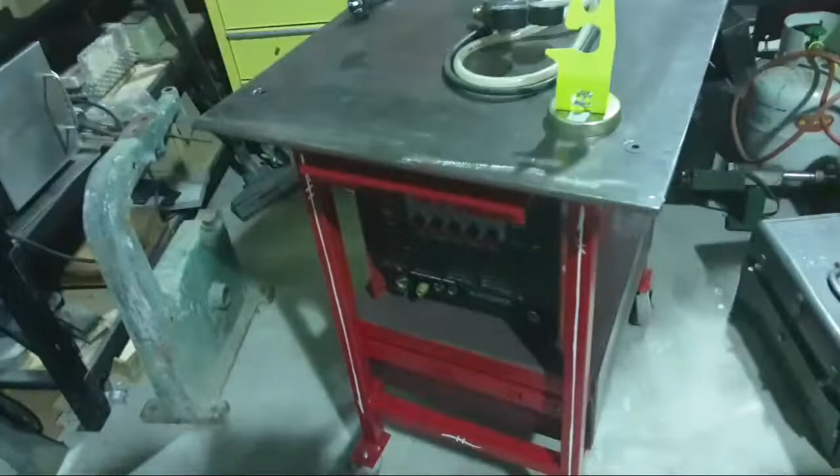So have a look - these are just like countersink M12 screws and some coupling nuts and some bolts. That was the top there that had a machine bolted on it before.

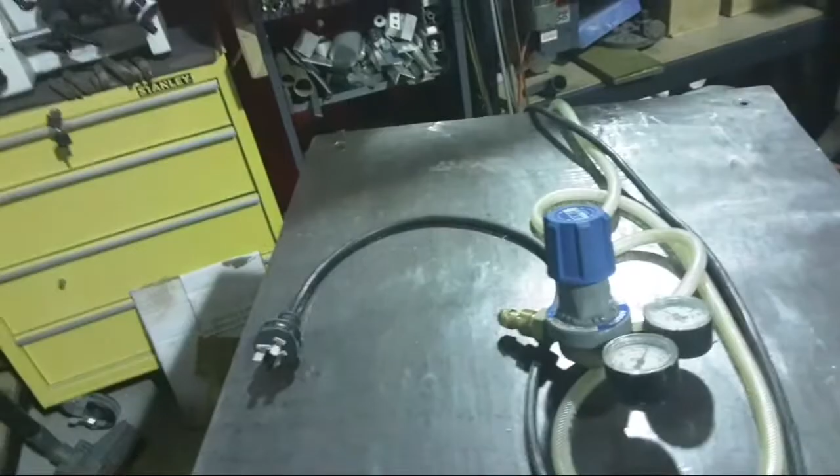Don't know about this whole clamp on this bench thing. Someone had this really great idea - hold the phones. Hasn't actually been put into practice yet, but we'll live with it.

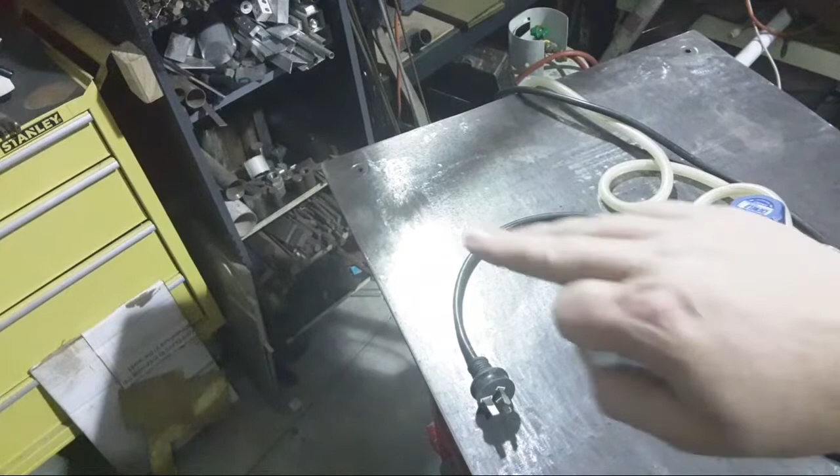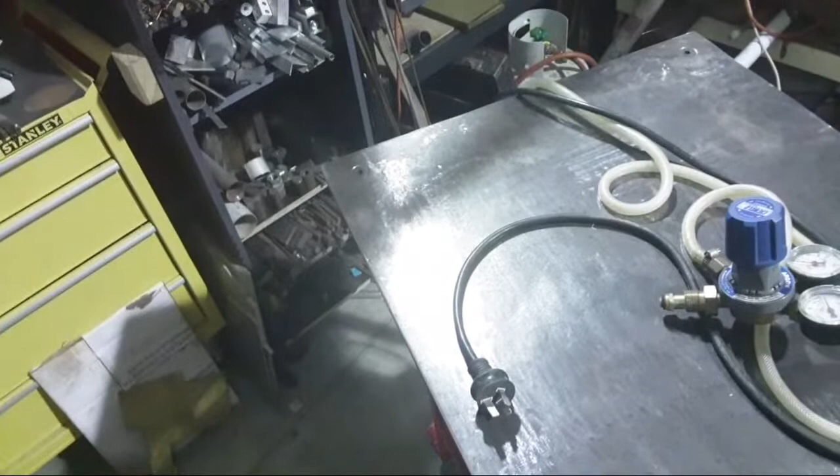Anyway, that's me just talking. So, got a decent lump of plate on it - it's really good. No bottle yet. Still got to find some transport for a gas bottle to get here, and then I'll mess around with this and probably learn to weld again all over again, because I'm kind of a bit scratchy. Done a bit of stick welding since I've had this here, but that's about it.

Yeah, Adam says I put the old man's name on the side of that, which is a nice little bit of lettering. This drawer here is just kick open - look at that - and kick shut.

Electric plugs - talk electric plugs. That's just a 3-pin. No, we probably shouldn't talk about that plug - we won't. That's the welder plug, and that used to be 10 amp, but maybe it's not anymore, if you get my meaning.

So there's another prototype job, just because I can, not because I might actually make something, over there on the lathe, if you have a look at that. Something I'm messing about with too.

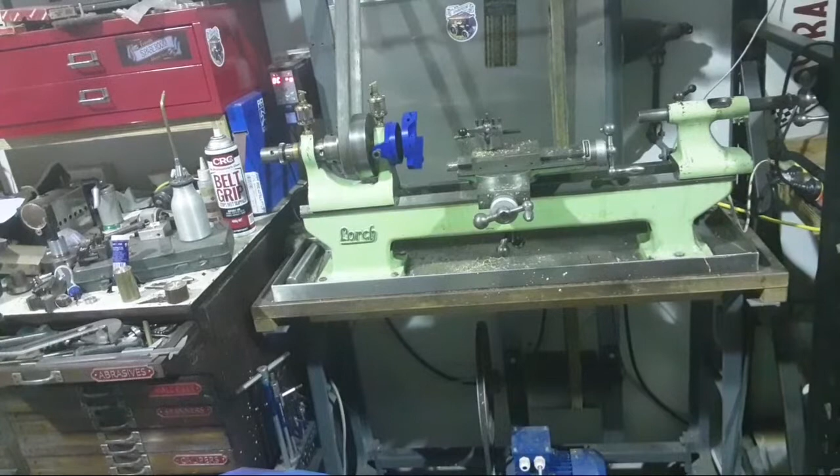Messing with that - I don't know what I'm going to do with that, but it all looks like it's probably actually going to work now. I've 3D printed, I've got a set of castings made for that device, and maybe one day I might make them, but it'd be fun just to see if it works. So, been messing with that and printing a few things up, see how it goes - that's a fun little project.

So watch that space for this one. Might happen at some point, but it might not too. Don't hold your breath, it may not even work, it's just proof of concept. I made patterns out of wood before I had a 3D printer, so I really don't know whether it's going to work without machining the pattern, machining the castings, or making a 3D printed one and seeing if that works. So I'll print up some bits over the next couple of days and bolt it up and see what happens. Probably won't run it at full speed with 3D printed parts, but it'd be interesting to see the actual functions, which it might or might not.

So, yeah. You can draw your own conclusions about what that is and what it might do, or what it might not do. Anyway.

Bought some dowels for legs for the harmonograph. There you go, so they just need a bit of a finish up. Not a big job to finish them from there, I think, and do that probably without too much major sawdust or turning or anything. Also got some 8mm hydraulic tube, steel hydraulic tube pendulums for the harmonograph. Now we all know what it is.

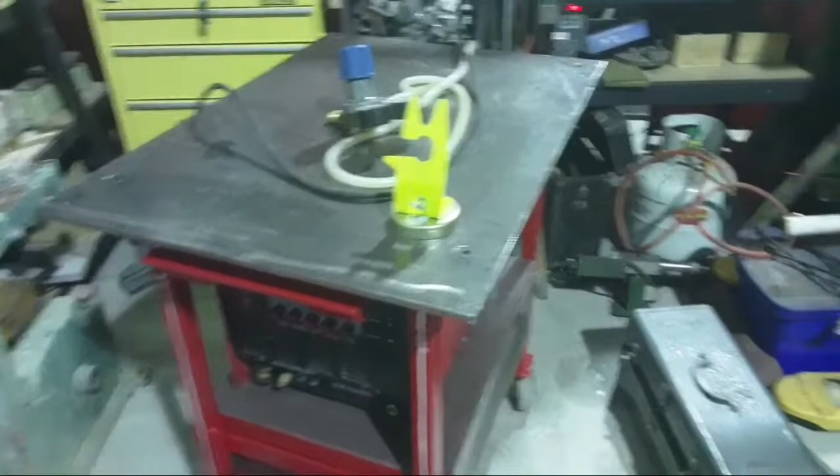That's just sort of a project that's waiting for me to clear this out. Because, hey Dan, because this lump of plate that was quite a bit bigger than that arrived in the workshop and I had to do something with it this weekend. So I've cleaned that up and screwed it on, and that's done. So I can forget about that. And I can get back onto this, probably the harmonograph or whatever else. See how we go.

Did this quick bit of sign writing on the weekend too. This goes up in the library above the spark plug display, antique spark plug collection box. So it fits in there on the wall there nicely. Quick job, bit rough. That's variegated silver, that leaf.

If anyone's interested, that's kind of a bit of a cow thing, to be honest. And didn't get our size quite right in a couple of places. By the time I got down to this end, it was a bit tacked off. So we've got a couple of gaps, but you can't patch this leaf, so we've got to live with it. So anyway, if it'd been plain silver or plain gold, it wouldn't have had some issues. But if you look really carefully, there are issues with it. But apart from that, it's not bad. Fairly pleased with it. So it just jumps out a bit. I like that.

In other news, flatmate Dan, new bike, new ride, Honda PCX 160. Pretty nice little bike actually for the money, brand new. Seems to have plenty of get up and go, and it's nice and easily serviced, easy to get on and off. It's all like keyless start and all that sort of stuff, immobiliser. ABS on the front, I think drums on the back. What other questions? I think they're belt drive.

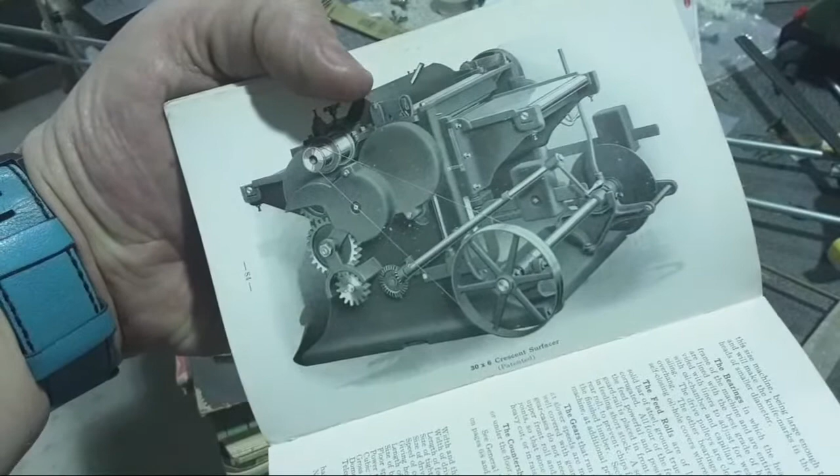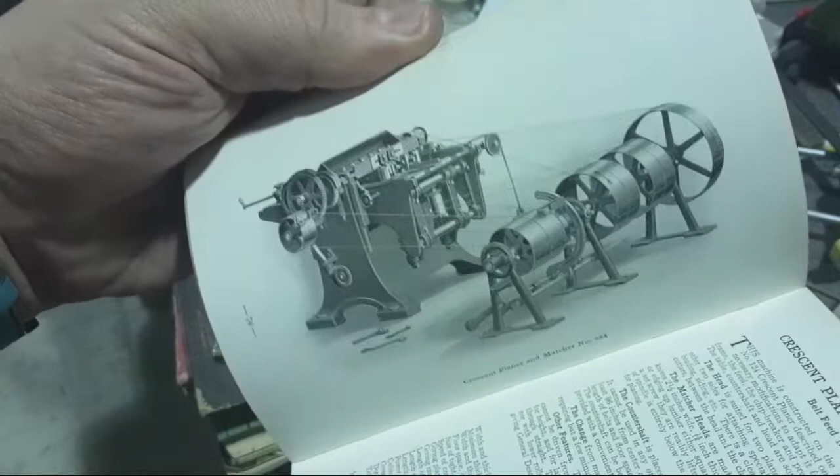Dropped off a huge box of books, and there's some cool stuff amongst them. I don't know if we're really very interested, but look at this. Crescent Woodworking Machinery catalogue. A lot of very cool things in there. Universal Borer. Surfacer. Planer and matcher. Look at the crazy line shaft gear on that to make everything work.

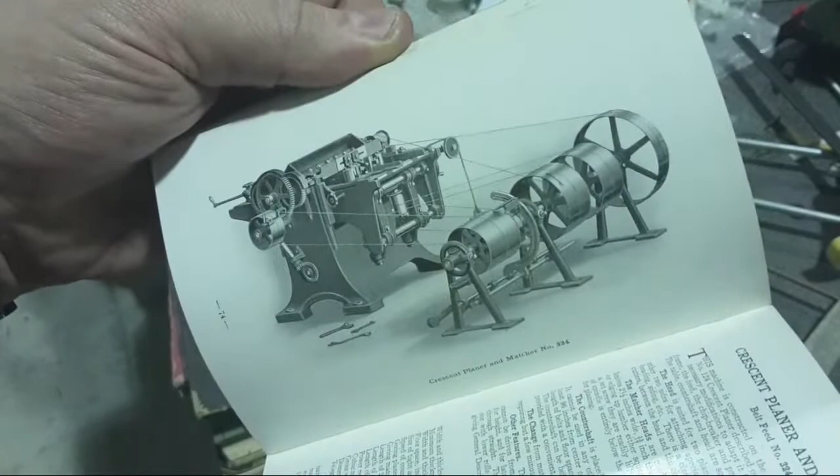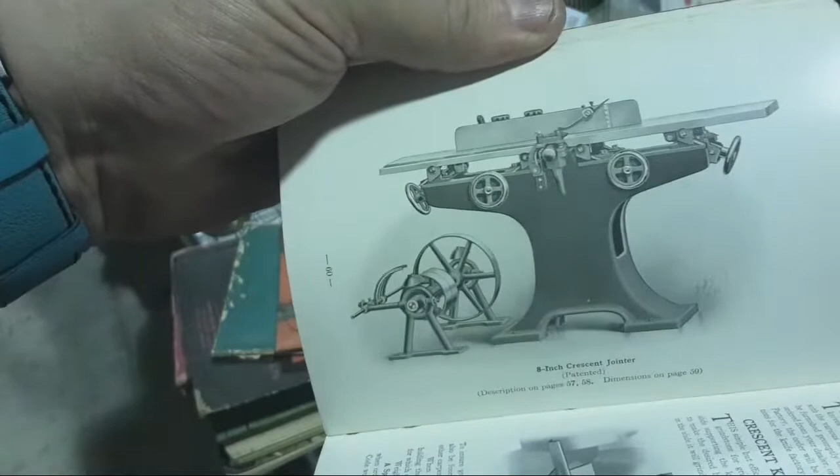Really nice technical illustrations. These are photographs that are actually airbrushed or retouched. Pretty nice, actually. 8-inch jointer. Don't know what year it is, but there's no square head on that machine, so that's pretty, if you look at that, it's a pretty modern machine, really.

1914. Pretty modern machine for 1914. Lots of cool stuff. So it's a fun book.

There's one called Taking Care of Your Battery, which is very important, I guess, if you're a motorist. There's an introductory instruction book on the Westinghouse automatic brake, which is an ex-railway book, I guess. Shows what the triple valve looks like, hoses, couplings, brake cylinders, things like that. Very cool.

Here's one called Why Don't the Railways? Don't know what this is about, I haven't really looked at it. The railways of Queensland belong to the people, apparently. We're trying to know something of the railway problems that directly or indirectly affect them. This is one of those old things where instead of fixing the problems, they just spend the money making a book of excuses, obviously. This is a book of excuses.

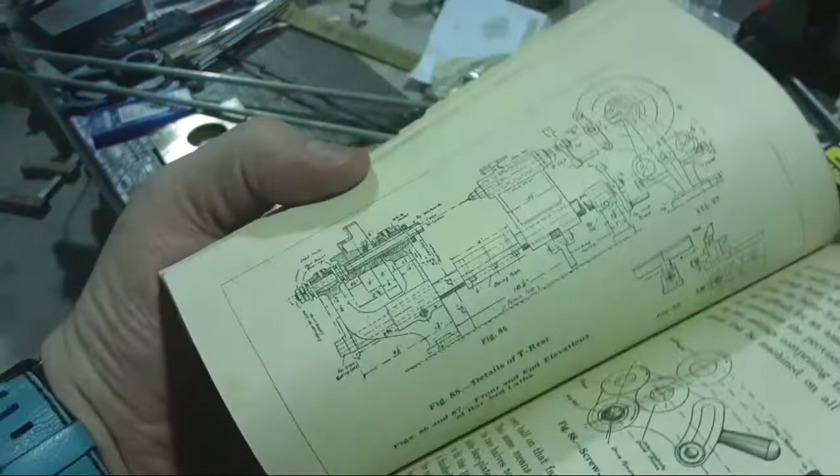Making and Using Small Lathes. This is a book and a half. Look at this, how cool is that? Lathe with round bar bed. Details of the T-rest, marking out the centre hole, aligning the bed shears.

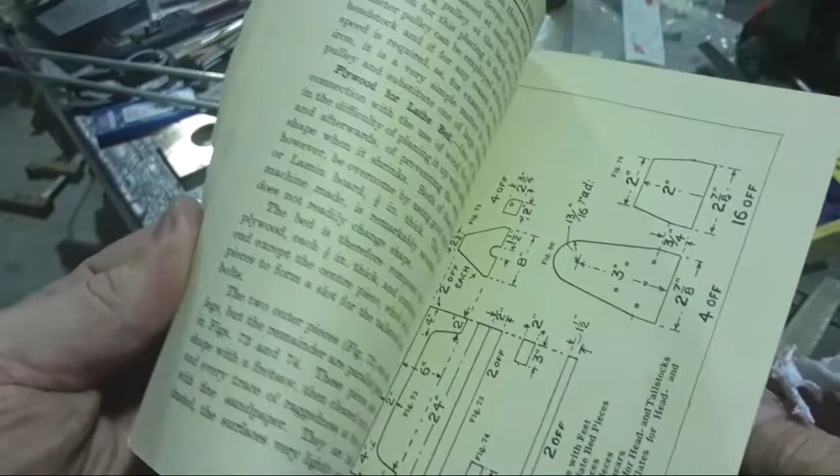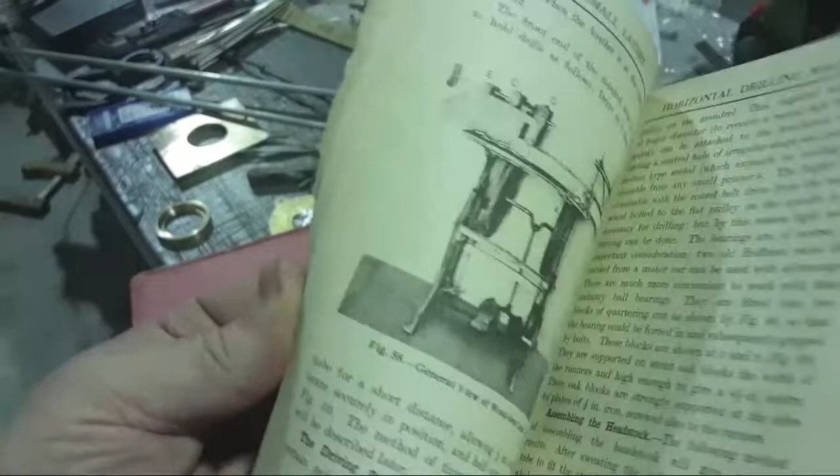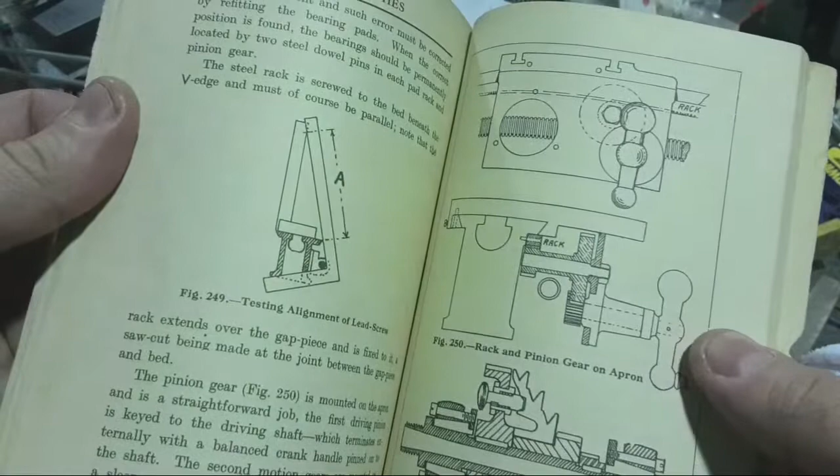There you go, Adam, it's a book on making your own lathe. How to set up a motor, how to set up a treadle. Details of a tailstock, look at that. The assembled driving wheel, pulleys, rack and pinion gears on aprons.

Screw cutting Yankee lathe made from castings and parts. How cool is that?

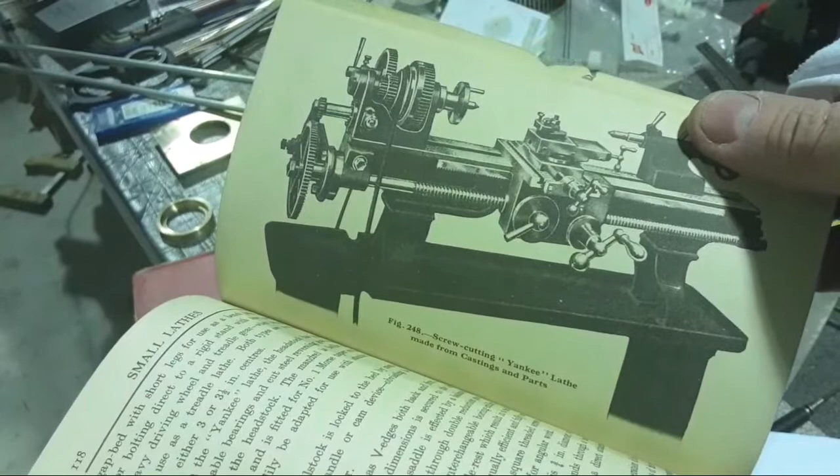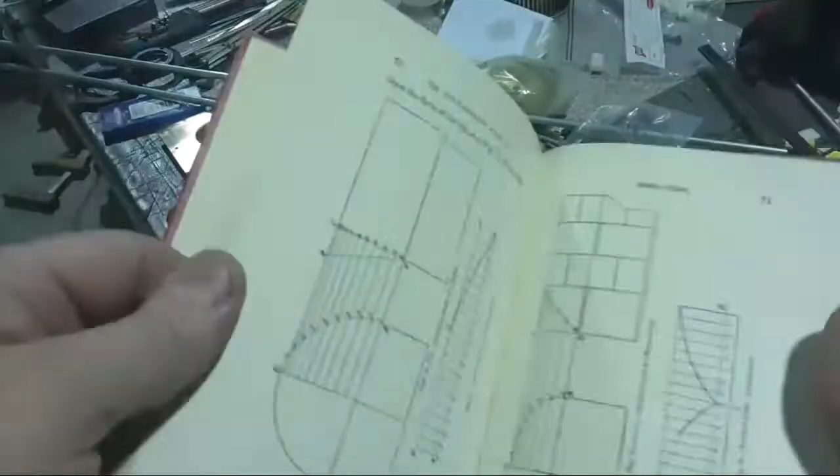There's one called The Boilermaker's Assistant by Courtney and Malden, from Technical Press. Cutting plates and pressures and templates, things like that, fit ups and joints.

Hey, John. So there we go.

Another one, I don't know if this is really boring anyone. How to Work Sheet Metal by Percival Marshall, which is a Model Engineer publication. Tin snips and stuff. Don't know if I'm that keen on sheet metal work, but anyway, fun book.

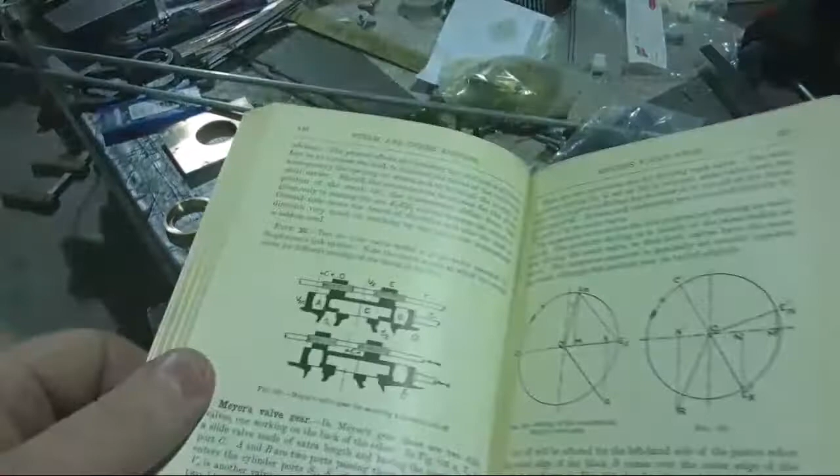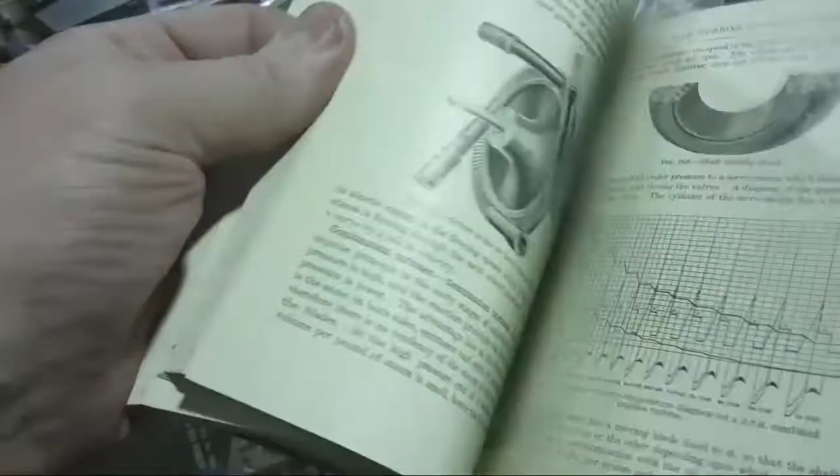Might be worth sitting down and reading. In turbines, some cool things in there.

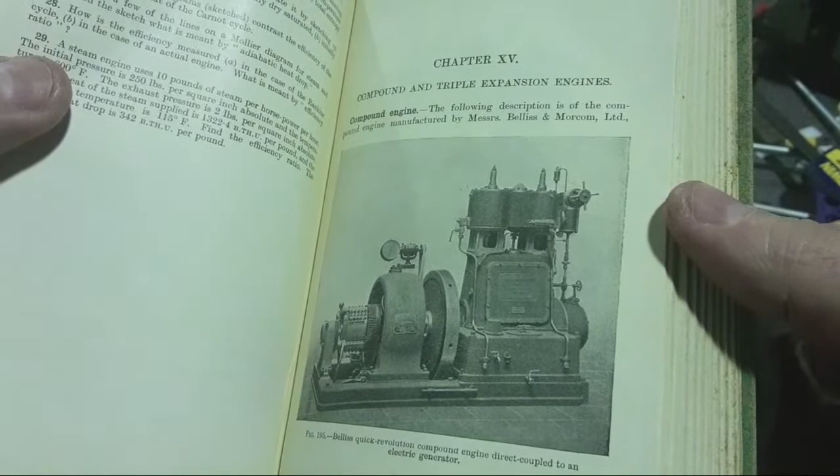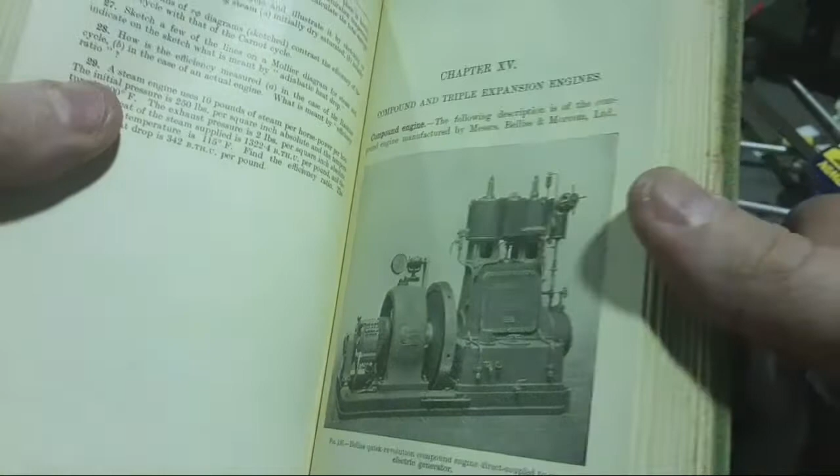Percival Marshall, he was earlier than World War II, I think. Well, by World War II, he must have been nearly dead. Percival Marshall founded Model Engineer in 1898. He was, I believe he was - oh gosh, no, I can't get my Percival Marshall history right, so I'm not going to say anything.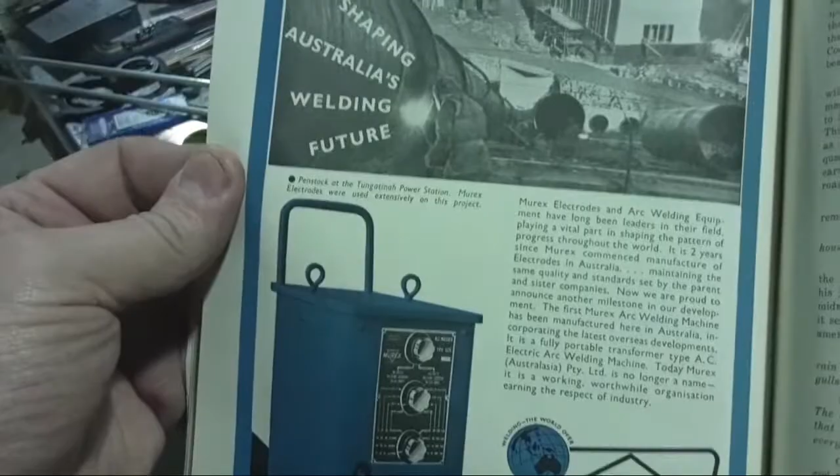Anywhere else in the world, you buy a Hobart Welder. In Hobart, you buy a Murex. There you go.

Derwent Park, Hobart, Tasmania. How cool is that? G'day. Dan's just come out to look at his bike again.

Charles Davis, Hardware Merchants, Connerville, Cressy. We built a trailer for the O'Connors at Connerville, Cressy. And the house looked just like that too in the 90s.

Where Tasmanian newsprint begins, there you go. There's a classy picture of two guys pulling a saw with this old wool flannel. That'd be itchy. They're both wearing flannel shirts, dungaree trousers, sawdust down the back there, and it'd be the most miserable thing. Sorry. If you've ever worn one of them shirts, the shearer's flannel's not much fun, sawdust.

So there you go. You go, Donald Gorridge.

Also owned the Yellow Express service, the West Coast Freighting service, and West Coast Motors at Queenstown. They sold Land Rovers, Rover cars. There's a Rover 90, 70 or 90. And the Javelin, Bradford commercial vehicles, Matchless and Triumph motorcycles, Simplex marine engines, and Landmaster rotary hoe. There you go.

Ross Garage is still there, still looks exactly the same, I think. Very Hobart oriented, Fuller's Bookshop's still there. And the Samoyed Kennels.

So there you go, some pretty cool stuff in this book, actually. I really enjoyed that. Sorry to... How about Daffa Crisps?

The Ship Hotel. Furners Hotel in Ulverstone. Customs House Hotel in Hobart. British Hotel Deloraine, which still looks something like that, I think. Cabaret Saturday nights at the Regent Hotel in Burnie.

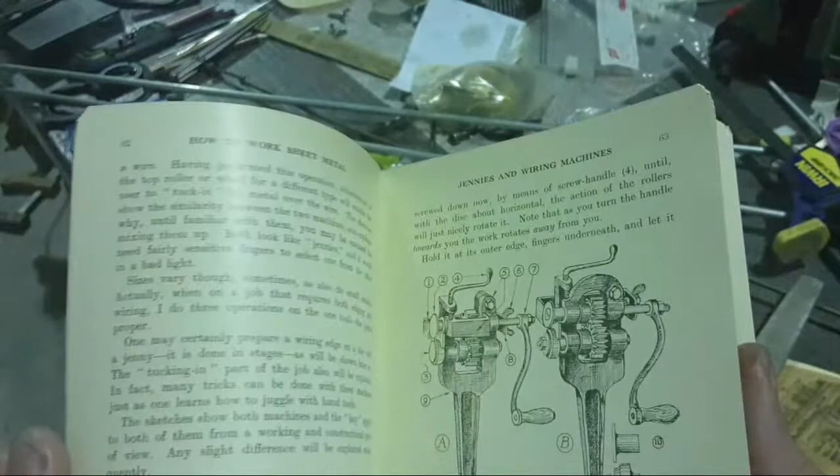Here's a book that's missing the cover. Or is that the cover? No, that's not the cover. How to work sheet metal. I'm going to sit down and read this - how cool is that? How to work sheet metal.

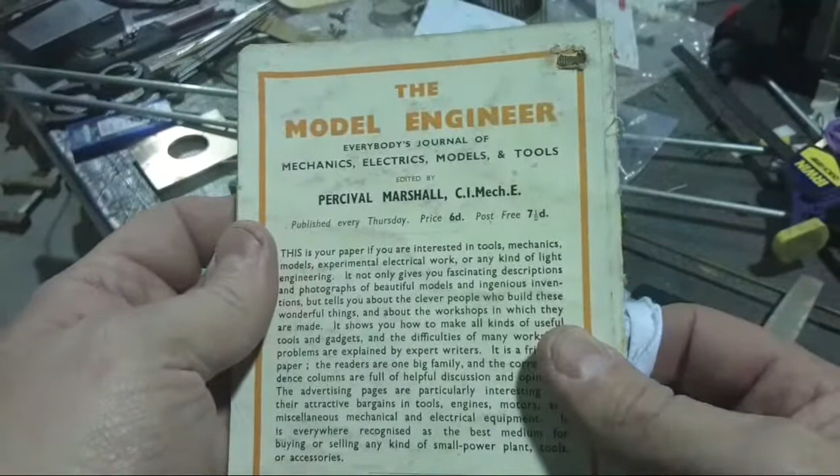Tank construction, brazing, soldering, riveting. And of course the Model Engineers Percival Marshall book - get this week's issue, it'll open the door to a new world of technical interest for you, obtainable through all newsagents, as above.

And the handbook on boiler making. Didn't we already say handbook on boiler making? There might be two of them. Yeah, I think we already looked at that. The other one never had covers - might be the same book, I don't know if it is or not. The other one was a bit more technical.

This one's got fold-out drawings. That's got a fold-out chart - bore 2-inch, curve 1. I don't know what the chart is, but anyway, it's there.

Some of these need some work. Anyway, books - love old books. Sorry guys, got carried away with old books. Anyway, that's sort of my day.

All the high tech of its day, yeah.

Also bought this at the nut and bolt place - change the subject. This is good stuff, right? This smells like a shearing shed, you can smell it, take a good deep breath. But really good on hands and things - not only is it good for your hands, but it also stops rust. Really good stuff, and I bought a big pot of it this time, that's a grease rather than a cream. I was pretty impressed to have that, the local nuts and bolts place had that.

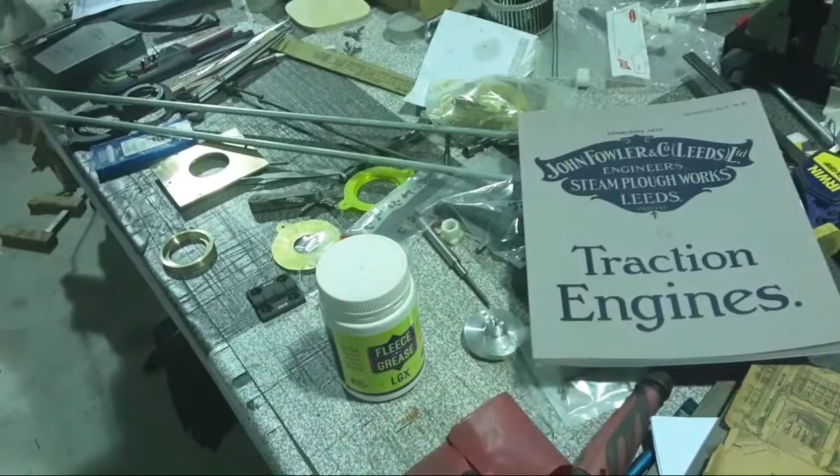Of course, today's my birthday, and I kind of didn't get a lot of birthday presents or anything, so I thought I'd shout myself. And don't judge me for this.

I guess I should, in full disclosure, come clean and say I bought these. I didn't pay anything like full price, and I don't think I even... I sort of paid half price, which was still too dear. But they're kind of nice.

I think this will bend enough so you don't have to be embarrassed by what's written underneath the lid. But a set of decent spanners in bigger sizes, metric sizes. So, yeah, something like that.

So I bought a set of these. They were the right price, almost - and they weren't, but they're nice to have.

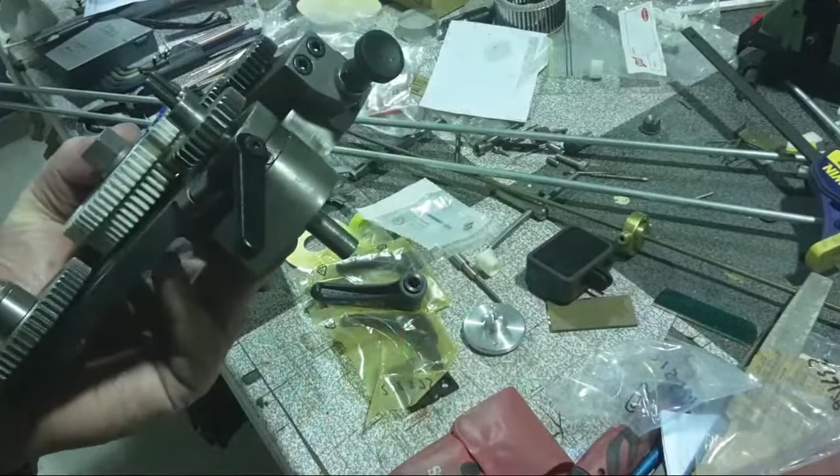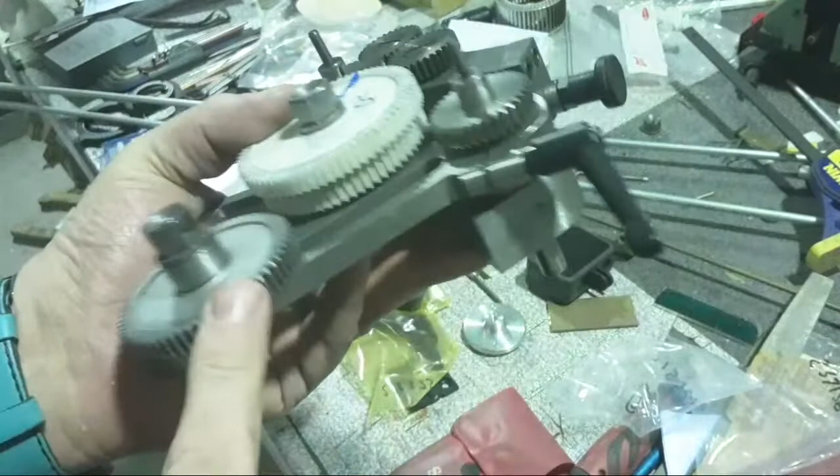And this one. So, I was a bit premature taking that bandage off that one. Sorry, anyone who's a bit scared of blood. Anyway, one for the banjo on here, which is really nice. So you just lift that up and you can reposition it, which is awesome.

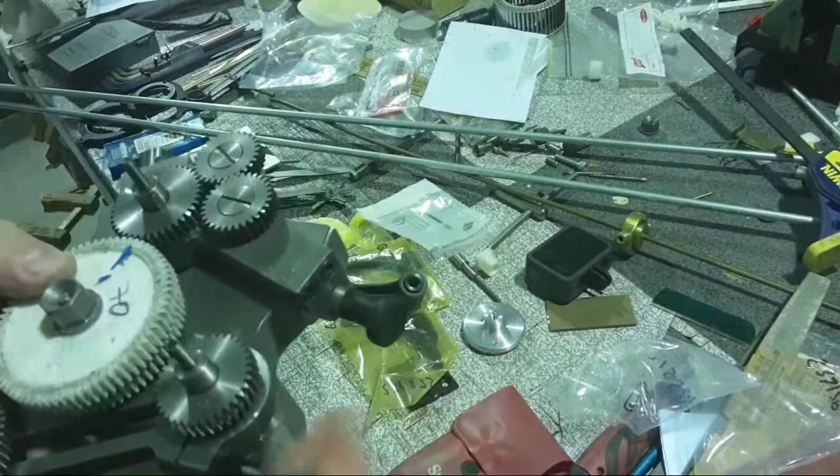So that's another overdue job, but it's fairly nice and neat and tidy there. I'm pretty pleased about that.

I was going to use these for a hinge here on the guard, but it's a bit ugly. I really don't like that. So I'm going to think of something else to put on here as a guard hinge.

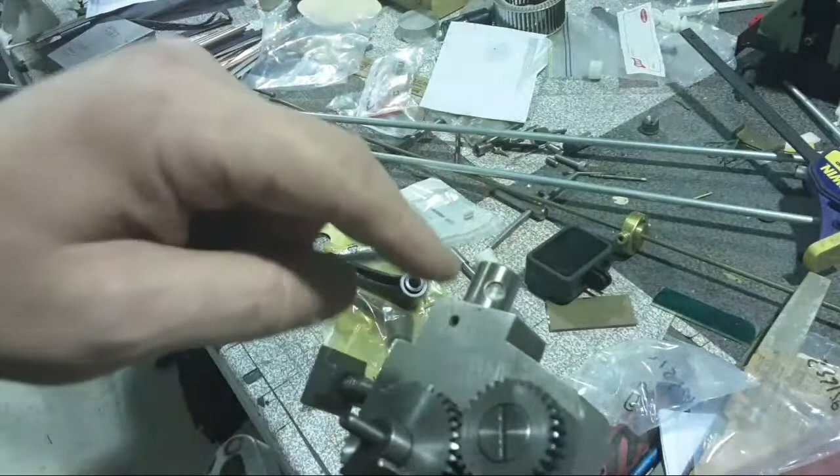Still thinking about that. Might even just put like 2 pins with a ball detent on them and spring loaded with a cross hole so that they click in place and pull off. So you just pull it off and push it back on. I'm not sure yet. Could put something that pushes in with an O-ring or something that goes right through with a clip on the back, or you could put 2 pins sticking out with a clip on the outside, or thumb nuts on the outside that are always going to rattle loose. I don't know yet. We're still working on the guard thing.

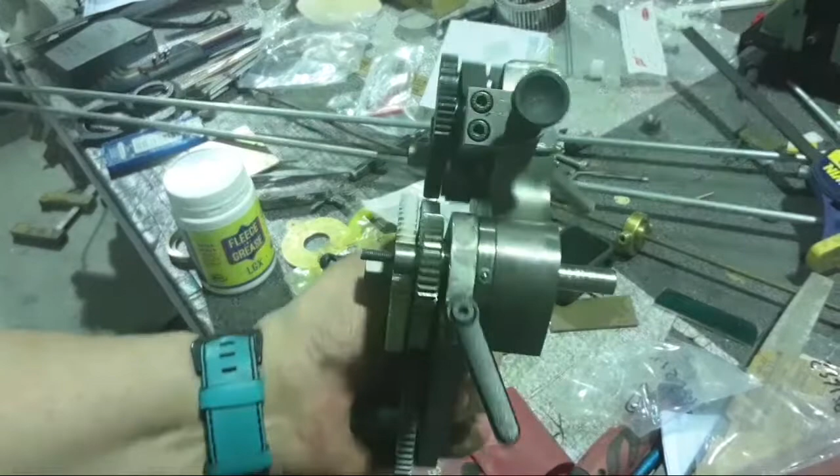But anyway, that looks pretty much in keeping with the rest. So pretty pleased about that. And they're not crazy expensive - I think the big one was like $10 and the little ones are like $4 or $5.